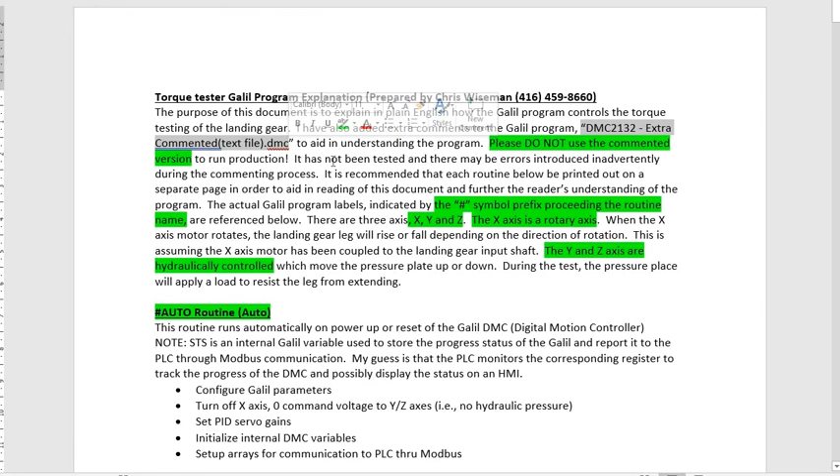First of all, when you see the Galil routine that I've commented, it's called DMC extra commented text file.dmc. That is a text file. You can open it up in any text editor. You can also open it up with the Galil programming software, and it'll recognize the .dmc extension on it.

But please don't use this as a production version. Inadvertently, I can enter some errors in there, and if you try to run it, it may or may not crash on the line where I put an incorrect command. Anyways, just use it for learning the program and debugging.

In this Word file, you'll see I reference the routine name in the Galil. Every routine name is preceded by a pound symbol or hashtag symbol, and you can look at that in the Galil program, and if it's important, I've highlighted it in here.

In the Galil program, there are 3 axes. X is the rotary, Y and Z are vertical. I haven't seen the machine run, I've seen a few videos, but Y and Z are hydraulic, and they move the test platform up and down against the leg which is being extended. X-axis is rotary, so a servo motor comes in, clamps onto the landing gear, rotates that, and the leg of the landing gear extends down. So the pound routine is the first routine that runs.

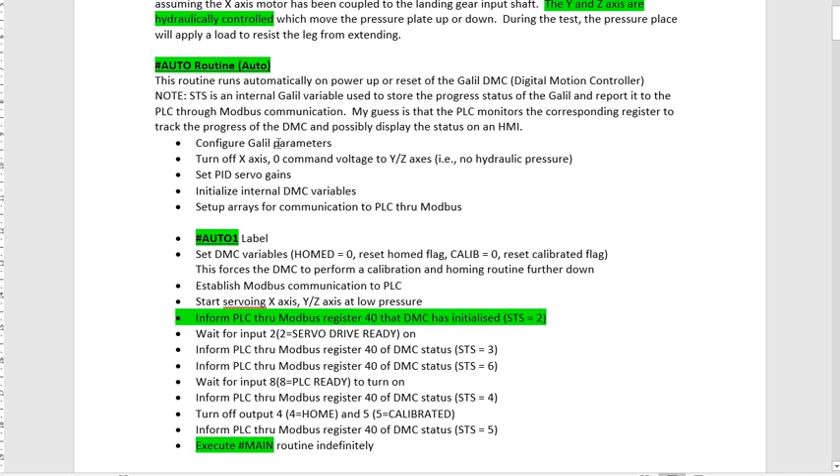So basically, inside there, they configure the Galil parameters. They turn off the axis. They set some gains in there. They set up a bunch of DMC variables. DMC is a digital motion controller, that's what Galil calls their controller. And they set up some arrays in there for communication to the PLC through Modbus.

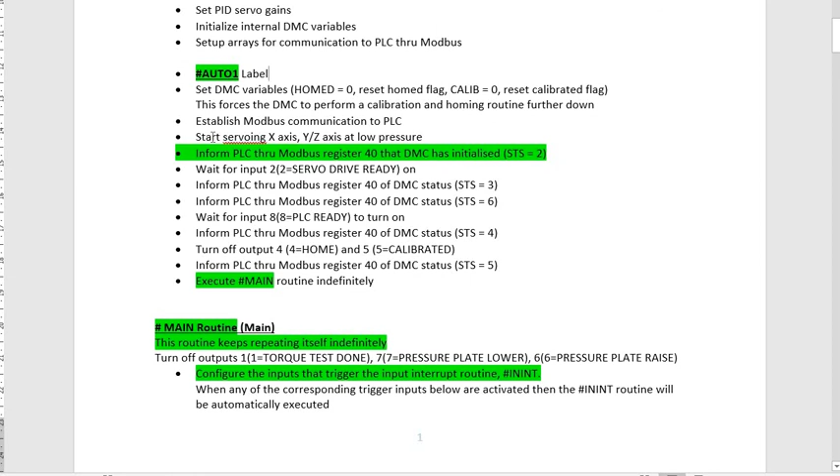Next, down through auto, they have an auto 1 label, and they set some more variables in there. They have some flags that they use. For example, internally, homed equals 0 when it's not homed, homed equals 1 when it's homed. Calib, or calibration, equals 0 when it's not calibrated, and calib will equal 1 when it's calibrated.

They communicate to the PLC, which I think is an SLC. They have the various flags in there that get set or reset. They communicate to the PLC, which I believe is SLC 500, through Modbus. And you'll see throughout the program there's an STS variable they use internally. I'm not sure what that exactly means, the STS, but they basically just set values and write it through Modbus.

For example here, inform the PLC through Modbus register 40 that the DMC has initialized, so they set it to 2. So in the PLC, somewhere in there, they'll be looking for that register to be written to number 40, and when it's 2, that means something to the PLC. You'll see that all throughout the program, it's writing to Modbus. For example, it's writing 3 here and 6 here, and that means something.

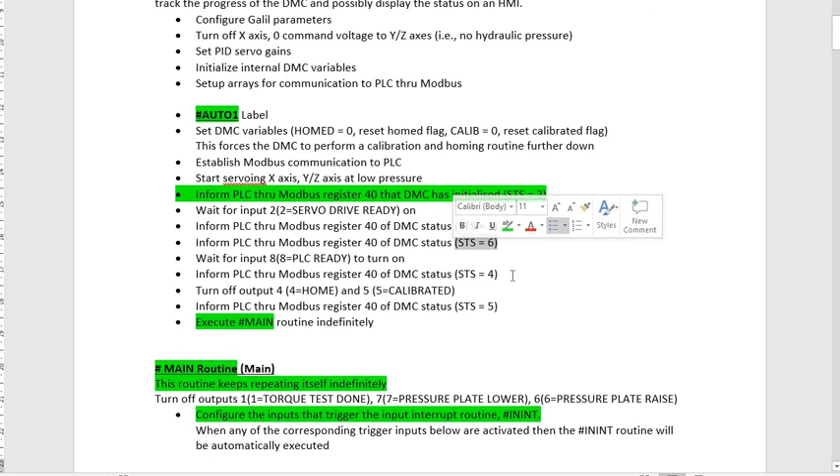Once the auto routine is done, they jump into this pound main routine, and pound main runs continuously. It's like a PLC program, it just keeps looping from the beginning all the way to the end, and there's a jump label in the program. I have repeat pound main here, it's basically in the program saying JP, jump pound main.

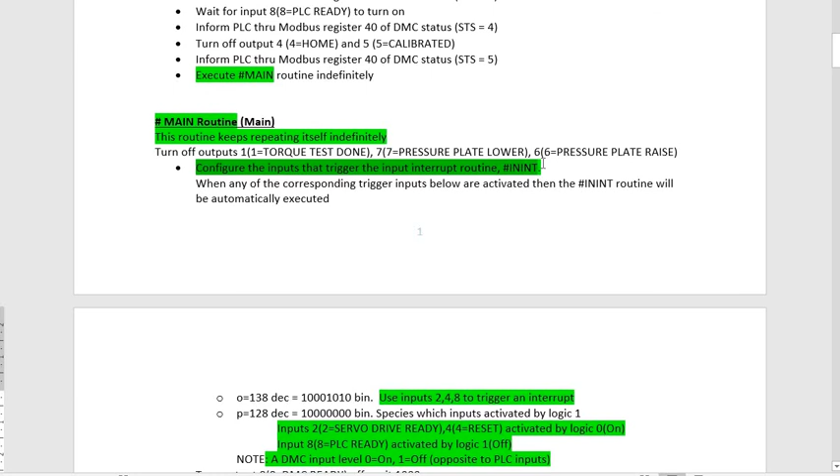So inside the main routine, they do configure the inputs to trigger what they call the input interrupt routine. That's a routine that gets executed automatically no matter what's going on. Whatever's currently happening just kind of gets left, and it jumps into this pound ININT routine.

So if you look through the code, you can read through this description, but basically what it does is checks the servo drive ready, input number 2, input number 4 is reset, and input number 8 is PLC ready. When these are either on or off, it'll jump to the pound ININT routine.

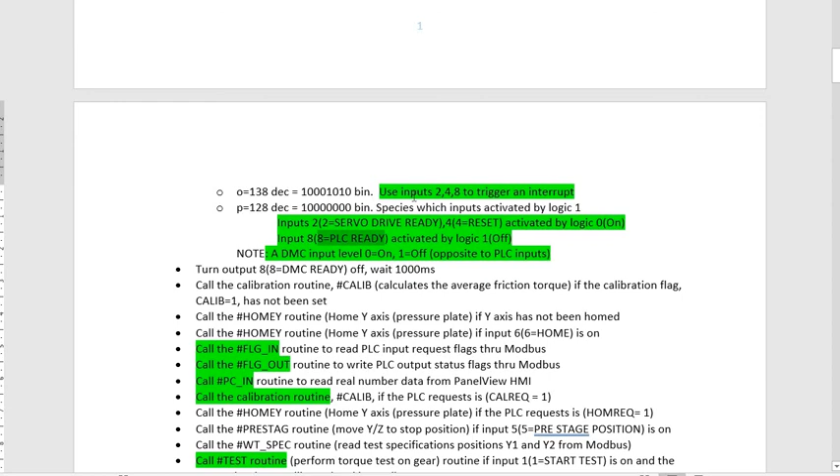Just a quick note before I continue too much further. At the end of this document, it describes the inputs and outputs. So there's an input - when the input on the Galil is on, it'll start the test. That's number 1. Number 2 is servo drive ready.

Number 3 is spindle ready. Number 4 is reset. 5 is pre-stage position. I couldn't find that on your schematic, but I found it in the program. And home, that's not on the schematic either. There's a spare, number 7. 8 is PLC ready. So these are either on or off depending on what the PLC is looking for.

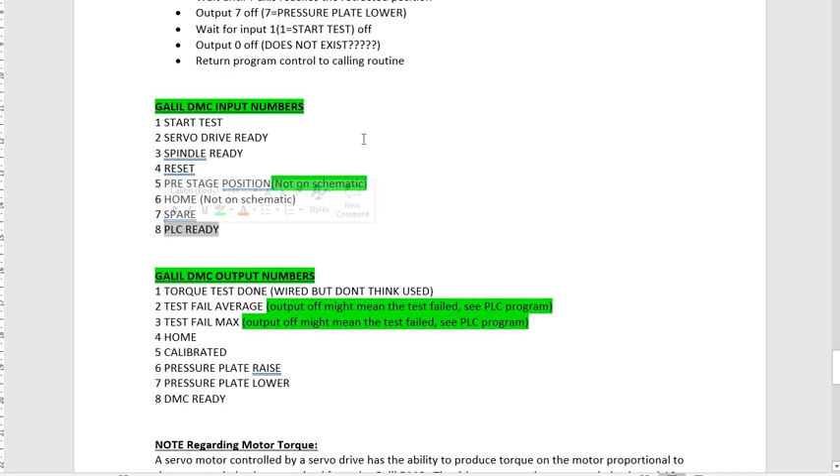So if the PLC wants to perform a homing routine, it'll turn on the home output. There's some outputs from the Galil to the PLC as well.

Torque test done - I didn't see this wired, so I'm not sure if it's still used, because a lot of these results from the test go through Modbus.

There's an output for test fail average and test fail max. These might be opposite logic in the PLC, so normally closed versus normally open. There's an output when it's homed, when it's calibrated.

Number 6, pressure plate raise, when the Galil needs a pressure plate raised, and when it needs the pressure plate lowered. And a DMC ready, saying that this program is running.

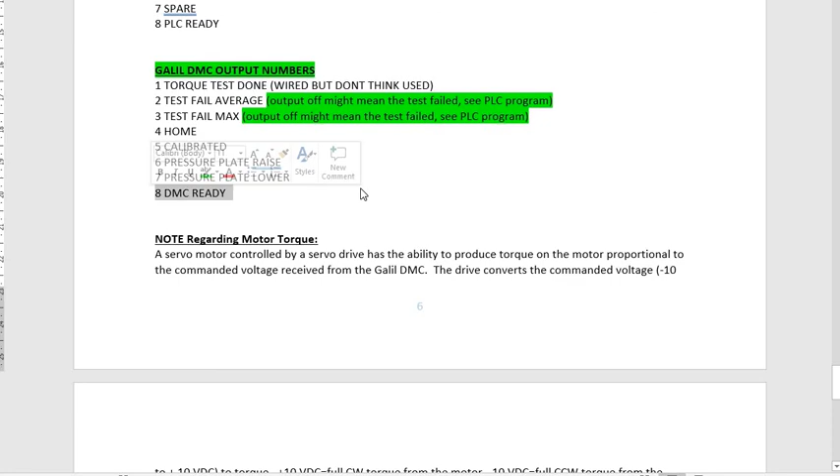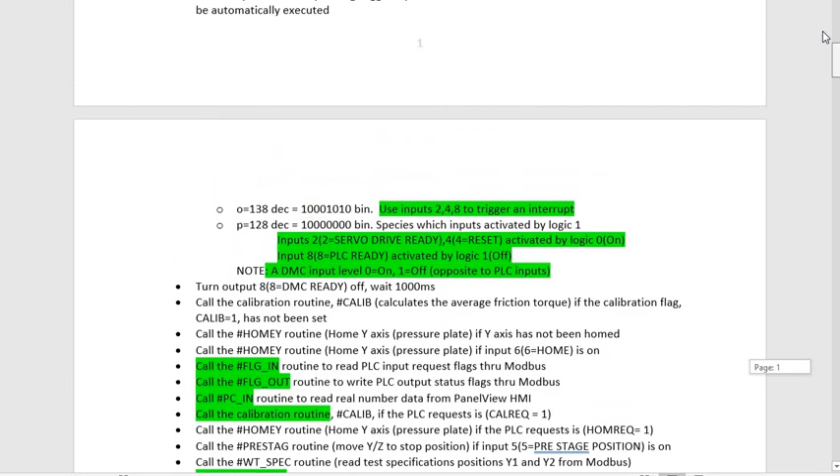So let me just go back up to where we left off. I think we were on the ININT. No, we weren't - we were back up on the main routine. So as I said, the main routine is just going to keep looping through this routine, up and down continuously. Never ends. It's like a scan of a PLC program.

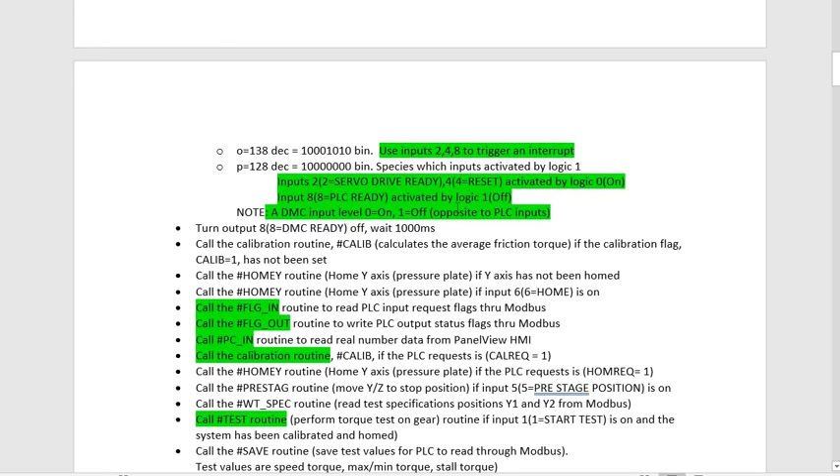You can see in there before it starts the test, it turns output 8 off, which is the DMC ready. It's telling the PLC it's ready to go, and it waits 1000 milliseconds, probably just to make sure it gets that signal. It homes the y-axis, which is the vertical axis. There is an encoder on the y-axis, I believe.

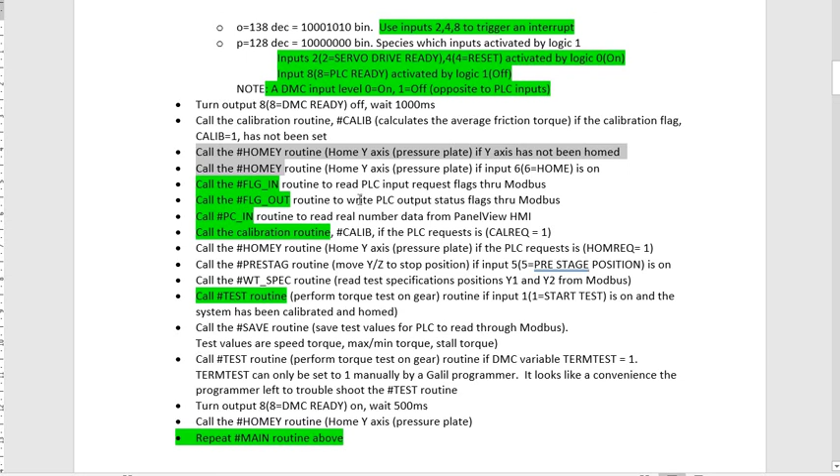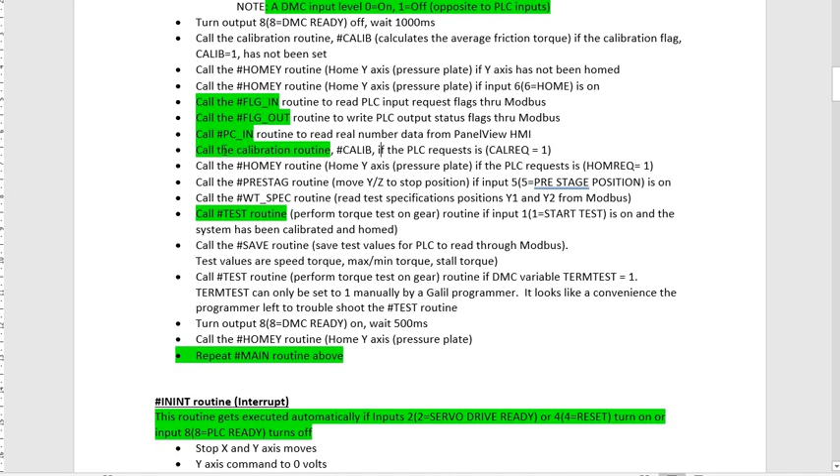There's a couple routines for reading the PLC inputs through Modbus and writing out the status flags to Modbus. There's also a routine here to read real number data from the panel view, HMI. Well, it's going to go through the PLC.

And it calls a calibration routine. The calibration routine basically just starts extending the leg of the landing gear, and as it's moving it at high speed, it checks the actual torque that's being registered to run at a high speed.

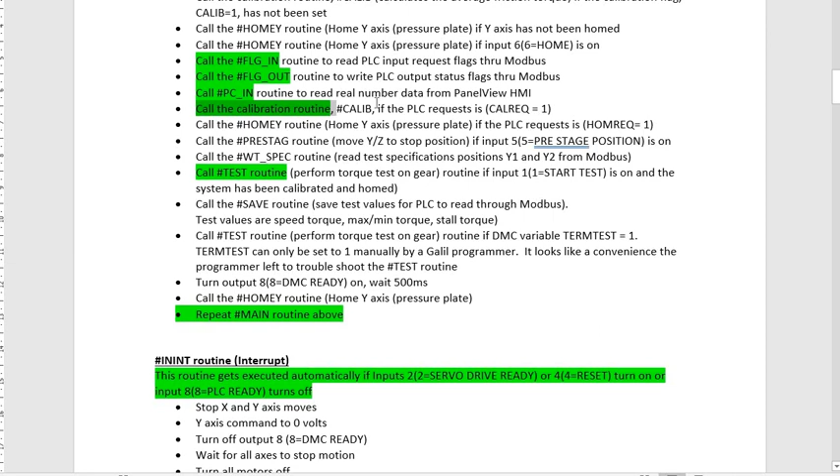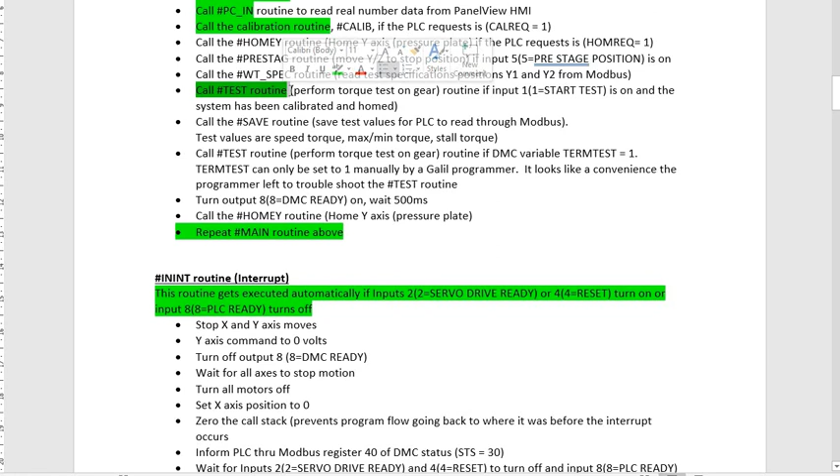It performs a homing routine on the Y, and it goes down and calls the test routine. So the test routine is performing a torque test on the gear.

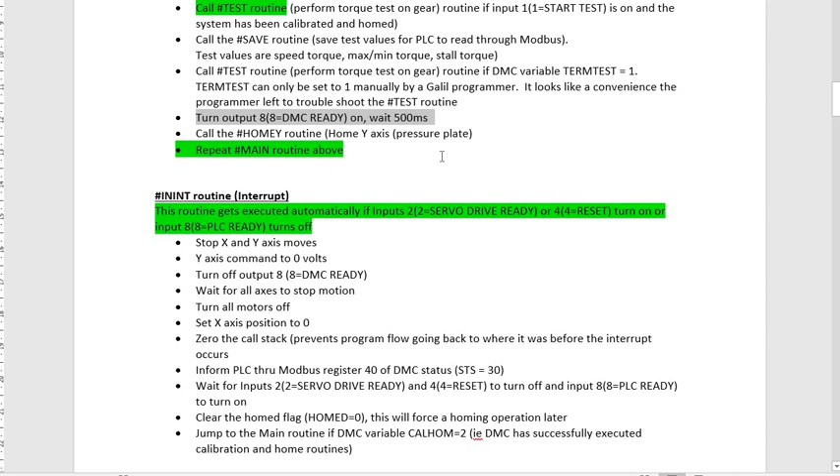Afterwards, it saves the values for the PLC to read through Modbus, and it indicates a little bit later on that DMC is still ready. I'm not sure why it does that twice, and it repeats this.

So pound ININT routine, I discussed it briefly above. You can read through here what it does - it stops the X and Y axis, Y commanded to 0 volts.

Just a quick note about the Y and Z axis. When there's 0 volts, I believe it's going to command 0 pressure on those hydraulic cylinders.

Calibration routine calculates the average friction torque while rotating the x-axis at high speed.

Once it's finished doing that, it writes the average friction DMC FRIC to the PLC through Modbus register 16. It sets a flag internally that it's completed the calibration, and it turns off a calibration request flag to the PLC because I believe the PLC will set that through Modbus.

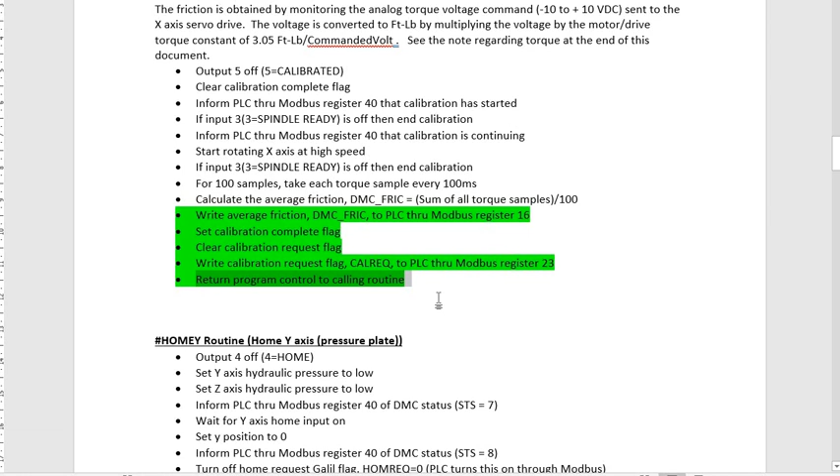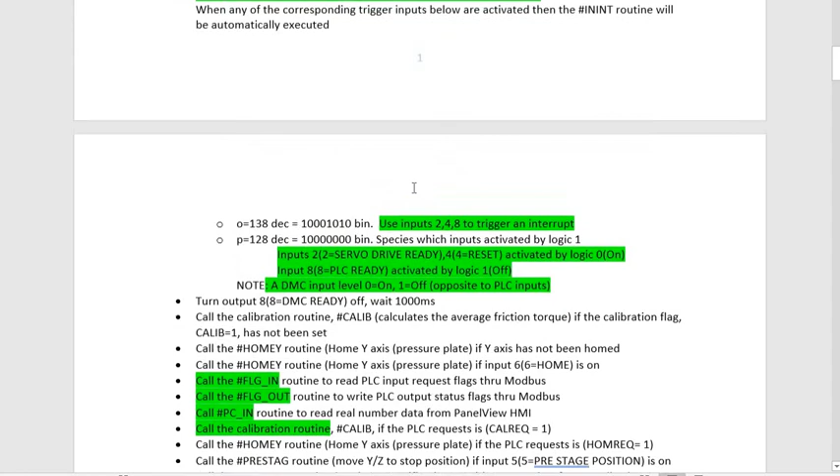And it writes a calibration request flag to the PLC through Modbus register 23, so it tells it it's finished. It goes to 0, so it's done, and the PLC will recognize that. Once it's done, it returns control back to the calling routine, which is, I believe, pound main. So this is pound calibration. If you go back to the main routine, you'll see here, call calibration routine.

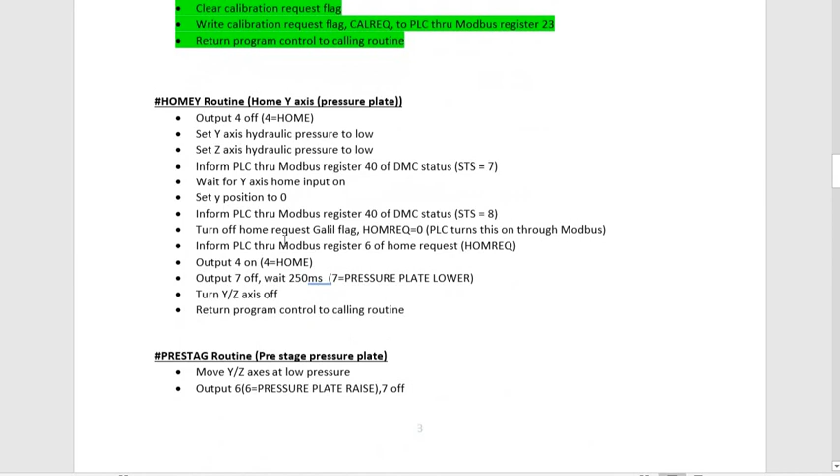Next of interest was the test routine. This is the test that actually applies an opposing load against the landing gear while the x-axis is extending the landing gear.

During this process, the commanded voltage to the servo drive is monitored and mathematically converted to torque. The analog torque command voltage is sent to the x-axis servo drive from the Galil DMC. So what's happening is it's going to extend the leg of the landing gear, and as it's doing that internally, because it's going to set a velocity to travel at, as that's happening it's going to be sending out a commanded voltage to command torque from that motor, and it monitors it internally.

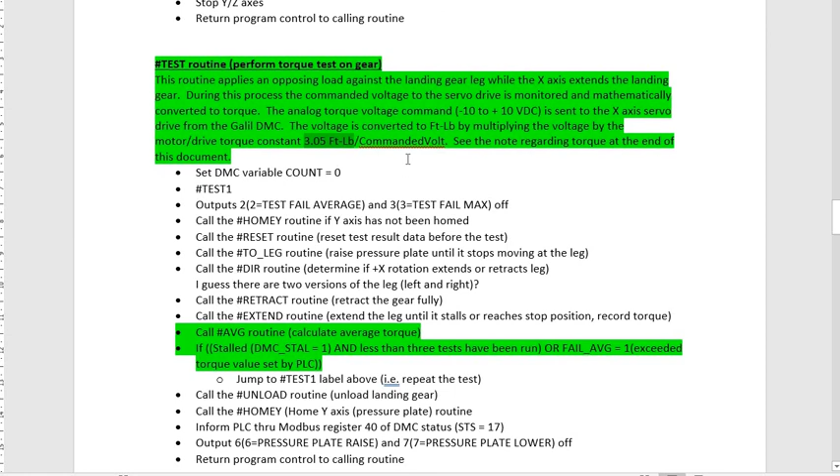There's a way for the Galil program to grab that value, and it converts that to torque by using this 3.05 foot-pounds per commanded volt. If you look at the end of this document, I explain how they arrive at that. It's not an exact value. If I had to throw it off the top of my head how accurate it is, I'll say plus or minus 10 to 20%, and that can change once the motor and drive get older.

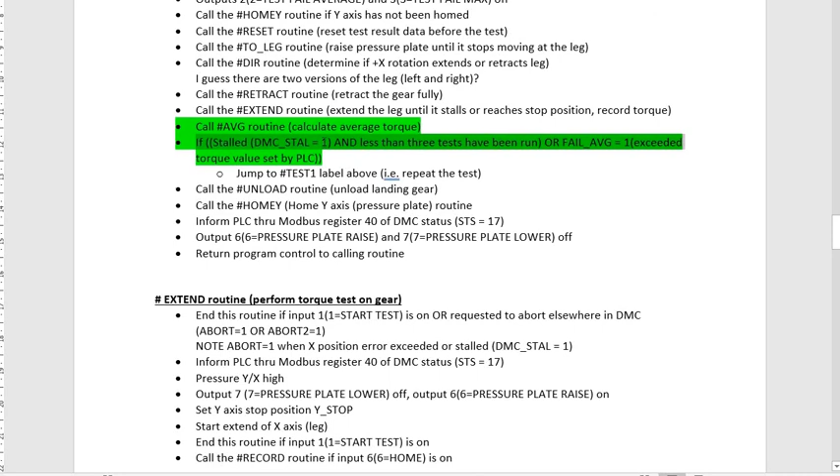Inside this routine, there's a pound AVG or average routine that calculates the average torque, and it looks to see if the motor has stalled or if it's failed the average, and it takes action according to that.

The record routine is probably something you guys would want to look through. So what it's going to initially do is it's going to take 4 samples right away of torque, and that's voltage, and it converts that to foot-pounds by multiplying by 3.05. It's going to subtract off the average frictional torque from the calibration routine, and then it's going to calculate the average sample torque for each sample.

At the end of that, it's going to call the calc routine and update torque calculations and return to the calling routine. So the important thing to get from here is for one sample, it's going to take four samples and then basically kind of average that out.

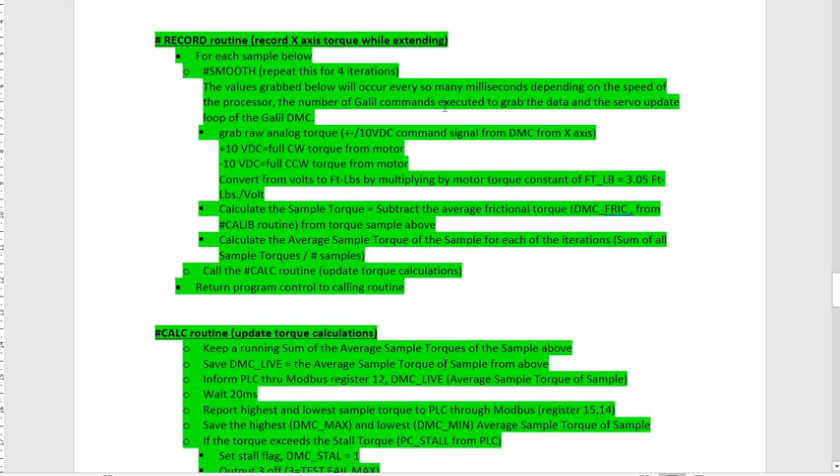Once it takes those 4 and grabs the average of it, it jumps to this calculation routine, which keeps running sum of all the average sample torques from above. It saves a live value for the PLC and writes it through to Modbus, waits 20 milliseconds, and then it's going to report the highest and lowest torque through PLC through Modbus.

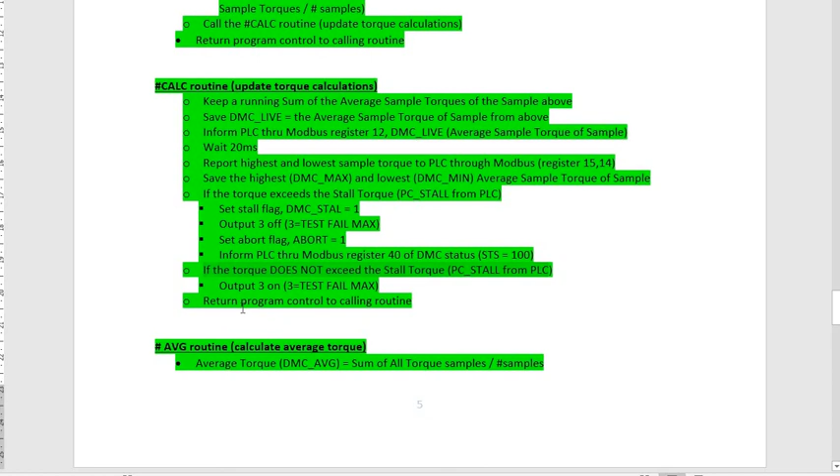It does a check in here if the torque exceeds the stall torque, and if it doesn't exceed the stall torque, it'll just keep going. There's also an average routine. You can read through that.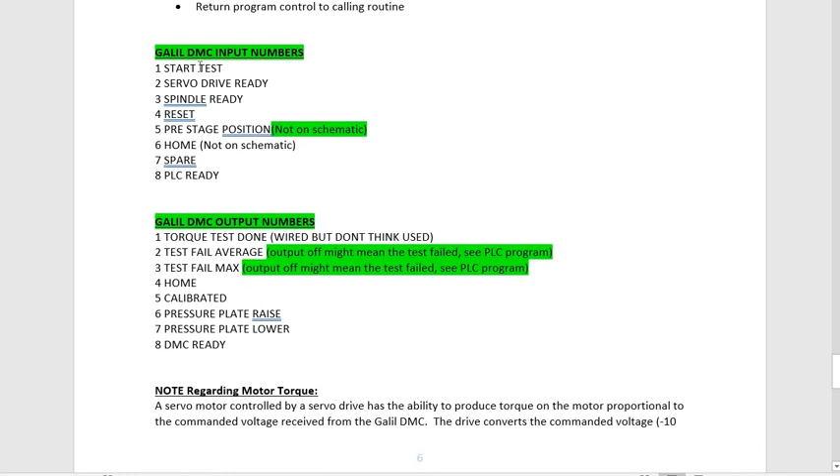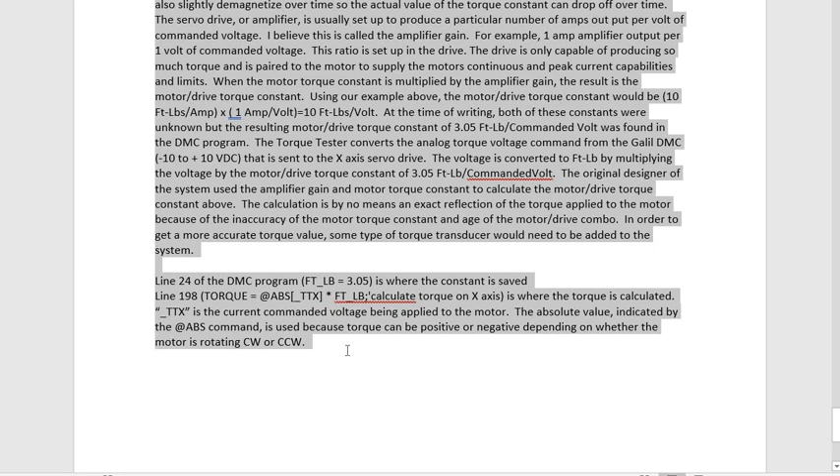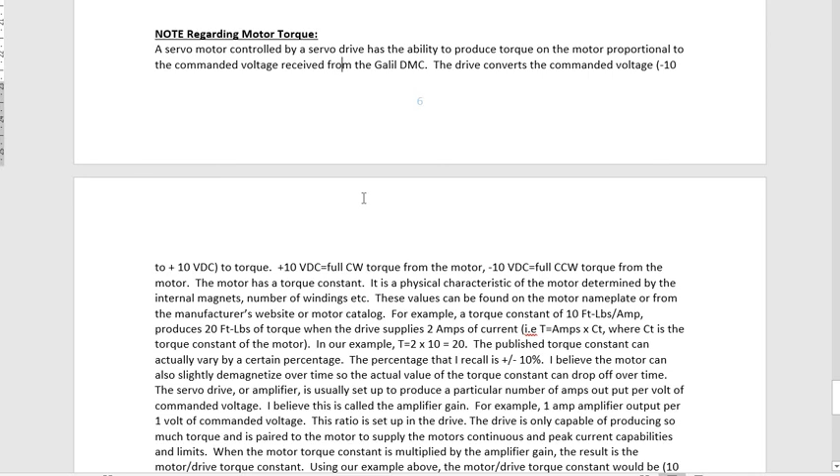I went through the Galil inputs and outputs already, and there's a detailed note on the end of this regarding how it calculates or converts from commanded voltage to the Galil to foot-pounds. There's a couple other videos I'm going to have on here going into a little bit more detail of the Galil program and the Galil software, how to communicate, how to send a few commands that might be of interest to you.

So just to point out these files, the one I just showed you is the Torque Tester Program Explanation.pdf, and the other one that's available to you guys is the actual Galil program that I commented. As I said, it does have a .dmc extension, but you can open that with any text editor. Thank you.